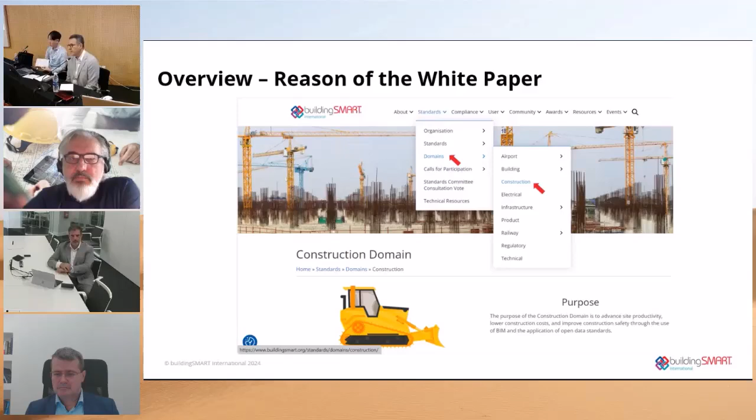tackle site productivity. What can we do to lower construction costs? What can we do to improve safety in construction, which is indeed one of the most important topics? But leveraging BIM technology—this is, of course, the core technology that we are tackling, but BIM technology using open standards.

The work this white paper tries to show is to summarize the different problems we are facing today, proposing new approaches to this digital transformation. I'm pretty sure we have all been facing problems trying to digitalize our processes, right? Even if we are not talking about construction, even in our personal lives, it's a little bit complicated, okay?

Of course, we are going to present, as I mentioned, some case studies, and provide more detailed information about how we can help solve this issue.

The white paper is applicable to any construction project. It doesn't matter if it's a building, infrastructure, bridge, road, etc. It's quite a general overview. It will also be quite interesting material to introduce newcomers or new people in organizations to understand what this issue of digitalizing a construction company is, or what is happening in the digitalization of the construction industry.

Three topics, very simple: the problem. We all face the situation of having different software vendors, different solutions, quite specialized, but it's quite complicated to communicate between them. And this is one of the issues that exists today.

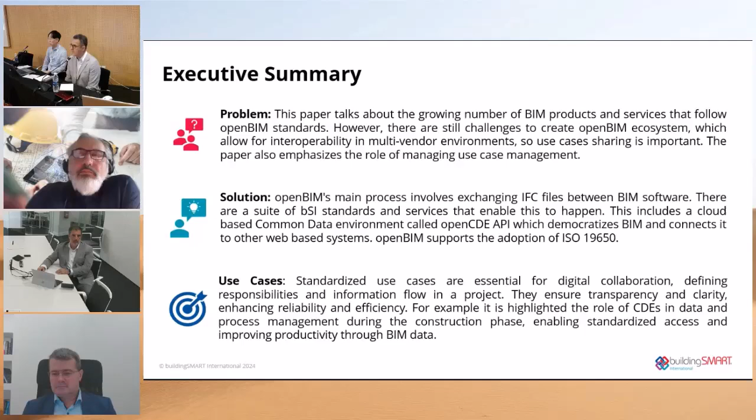Now, I mentioned the use cases—the way to show examples today is not really standardized. And one of the conclusions, maybe I'm talking too far ahead, is that we need to standardize this process for the new people, the new construction companies embracing digitalization, so they can leverage from other cases.

A bit of what has mostly been said, but I just want to focus on that. In this white paper, we try to summarize the challenges faced today and the opportunities, because having a challenge is not necessarily bad—it sparks creativity and opens doors for new businesses, new business models, or new opportunities to be more efficient.

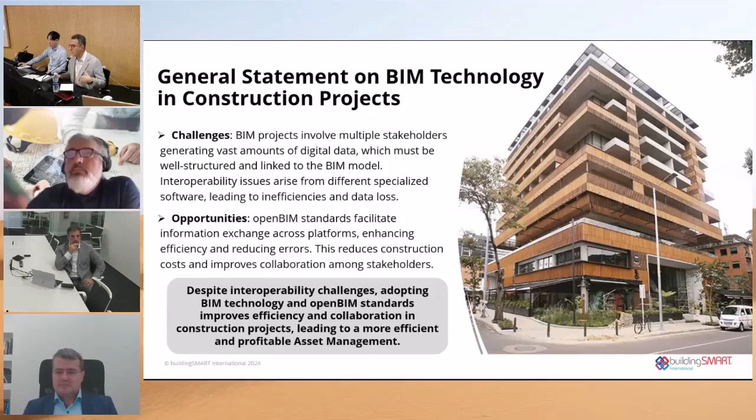So despite the fact that there are these interoperability problems communicating between software and data, these standards and new protocols, templates, etc., open up the opportunity to be more efficient, more profitable, and manage more information in just a few clicks. So I will hand over now to Ken, who will go deeper into the problem we are facing.

From this part I was mentioning, there are many problems, and in one word, I think we need much more communication, because Open BIM is some kind of concept. There's the concept, and of course there are some rigid standards defined by buildingSMART. But it depends on the software vendor if we use or create the software ecosystem. So creating the software ecosystem, we need some knowledge - Open BIM knowledge first, and then later individual software knowledge. But to combine many software and formats and create innovation, we need some kind of test, and that's a burden much more to us. That's I think the biggest problem, and we need much more information about Open BIM.

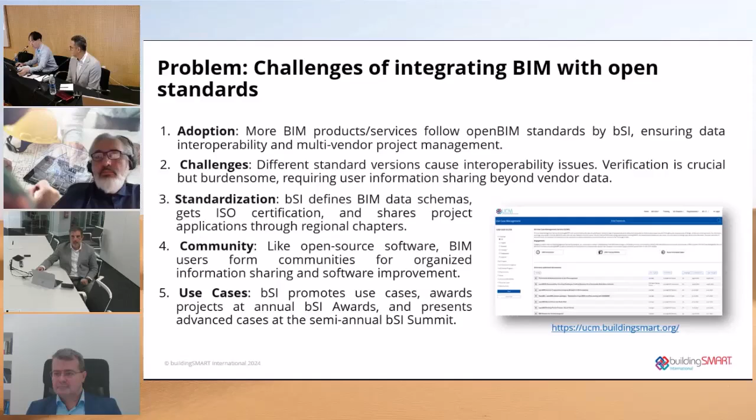And then the next one is the solution. The solution is not only building the community, but also technically we have many solution choices now. As you know, well, excuse me, yes - here comes the solution. An interoperability problem should be solved by the Open BIM community, like BSI. But we are now facing technology issues as well.

In the traditional process, exchanging of BIM data relies on IFC files shared bilaterally between software. But now, in the modern process, our working environment consists of many cloud systems, including the CDE. So it's a much more diverse solution, where we can share data with all project stakeholders simultaneously.

But on the other hand, we should understand new technology on the web, such as OpenCDE and an API named OpenCDE API, and bSDD, IDS, and validation services, etc. So those systems are working collaboratively on the network and based on API technology, which is commonly used worldwide in systems such as SNS and IoT domains. Therefore, we need much more collaboration with other industries and overcome technology obstacles by working together. This big shift has made BIM more accessible and interconnected, enhancing collaboration and innovation in the field, I believe.

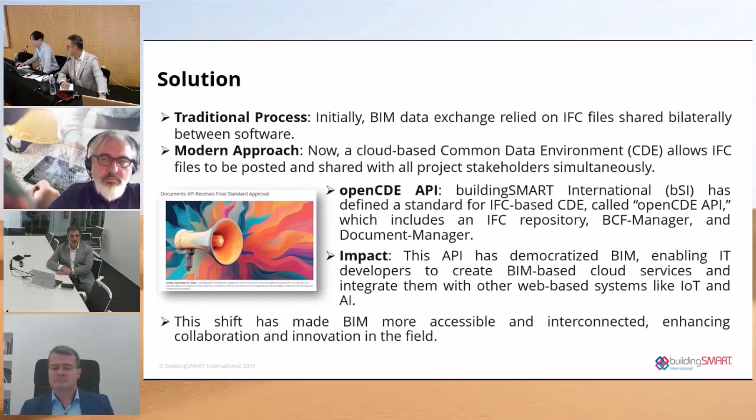The next slide is the ecosystem of BIM, specified to the construction phase. So it's slightly complicated, but it's very simple.

In the traditional process, there's the BIM software, and then the IFC file. And at the bottom, there is the domain of IFC. At the beginning, bSI established IFC for building. But as the IFC version went up to 2x3, version 4, 4.1 and 4.2, now it covers not only building but infrastructure, such as road, railway, and bridge, and facilities such as the airport, the port, and power plant.

Technically, IFC has two main roles. One is as a file format, and another is as a data schema. At the beginning, file-based data exchange between BIM software to secure interoperability was IFC's main role. But as you know well, now we have cloud-based data exchange with CDE. CDE technology has been developed with the evolution of IT technology.

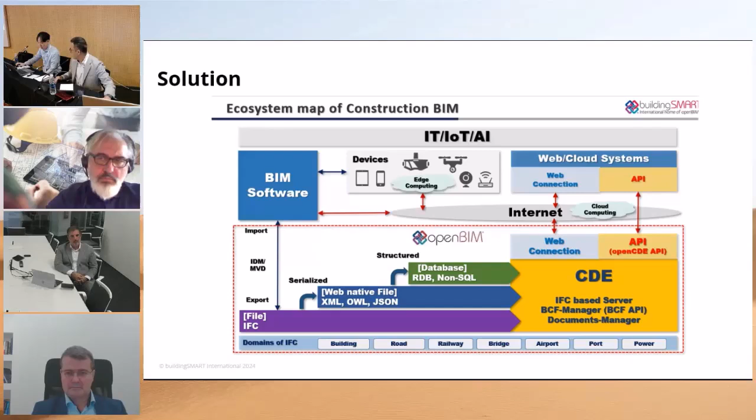A CDE standard named OpenCDE API was defined by bSI, and we can have interoperability among OpenCDEs now. That's the situation, and it's a very big change and big solution for us. So next, please. Yes. Thank you, Ken. So we'll hand over to Konstantinos, who's going to explain about the standards.

So thank you a lot. I'm just looking at the time. It's 12:30, and at the end of our presentation we have very important examples and a summary of use cases. So I would suggest going quite fast through the existing standards, and if we have time, we will come back. On the following slides you will see the naming of the existing standards we have, and they are really helpful in setting up a digital work environment.

So here you see the 19650, which gives us a frame about how we should work together in digitalization with documentation, graphical data, but also non-graphical data, and gives us a direction for how to go step by step. What we have to do with all these standards is use them, of course, but detail them, because it's not a one-to-one copy you can do with the standard. The standard is just giving you a frame. We have to detail them to connect them to our daily work. So 19650 is very important, giving us an overview of how to organize information management. Next slide, please.

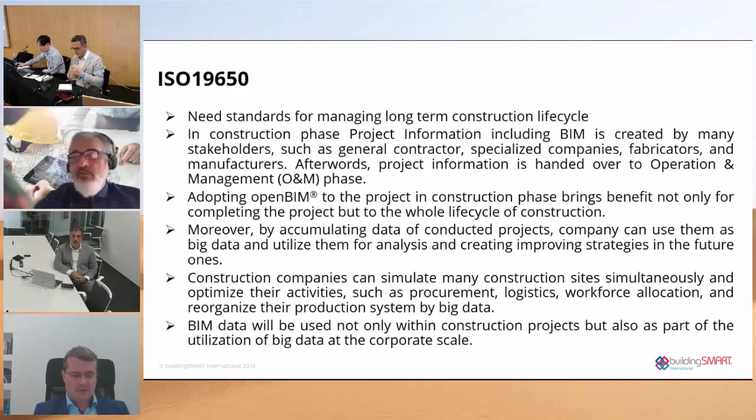As I already mentioned, the need for the standards is to manage long-term construction life cycles. This means that all people have to work together. For more detail, there are well-prepared slides I would ask you to read after this presentation. So let's go to the next slide to come nearer to our examples. buildingSMART is offering not only standards but also services which help us connect these standards you have seen, the ISO standards, to our daily work. It's vendor neutral, and it supports the collaborative process. Next slide, please.

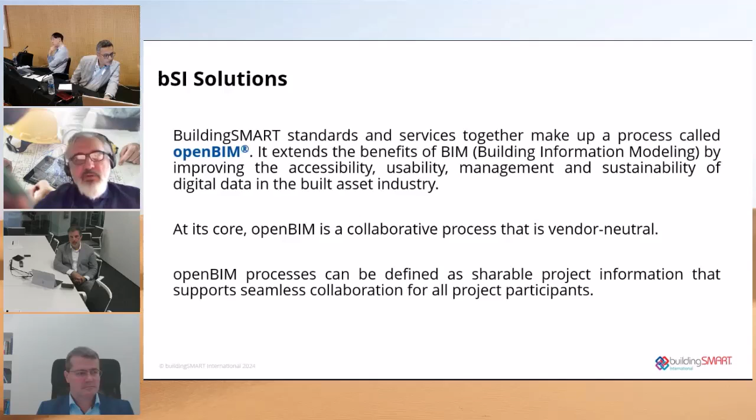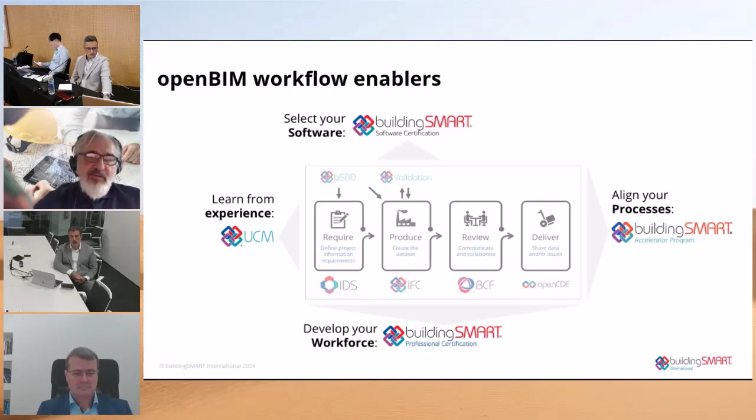So here we have one slide, a small overview of what we will show you in the examples about how this workflow is enabled. It usually starts with use case management, and we will dive into use case management some slides later. Use case management is really the base to organize the process chains. And this process chain is then supported by IFC, of course, by IDS, BCF, and OpenCDE standards, which are part of the next slides. So let's start with IFC. It was quite fast, but it starts with use case management. Okay, the next slide.

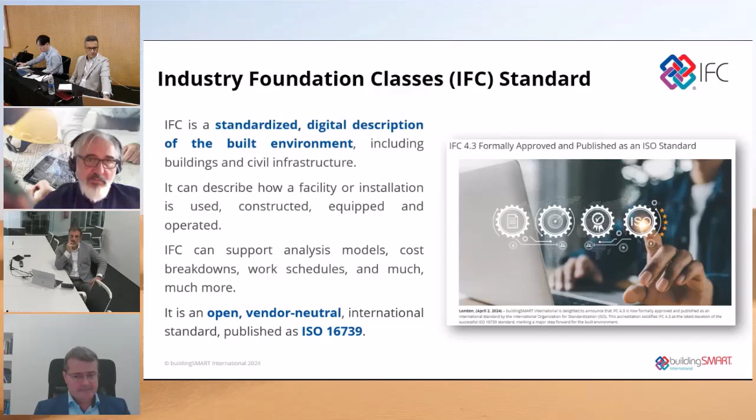The next slide is about IFC. IFC is standardizing the digital description of a building, of a built environment. So we have a clear definition of the objects we are exchanging, and it's neutral, and it's an ISO norm. This is very important, that it is a defined norm and can be used on the quality standards we have defined. Then it comes to collaboration, and BCF was quite a good move by buildingSMART to be able to transport issue management and coordination issues through different software.

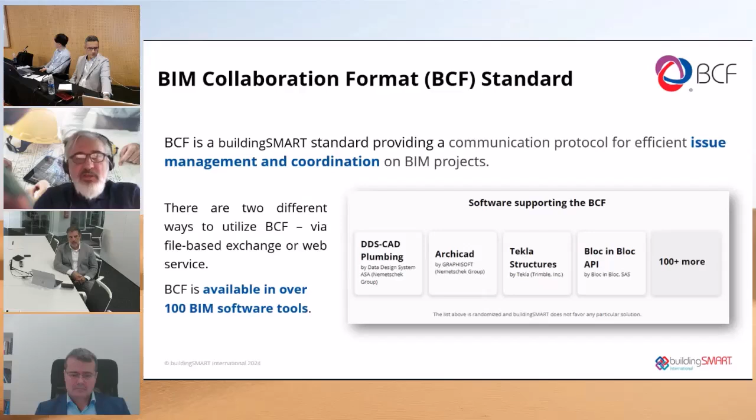And already BCF is available in more than 100 software tools, so it's very well implemented, and it really helps us to transport all these issues. So next, there's bSDD, which I think still has to be implemented more by the software industry. I have to ask the software industry at this time to really look at how to connect this bSDD into all the software solutions we have.

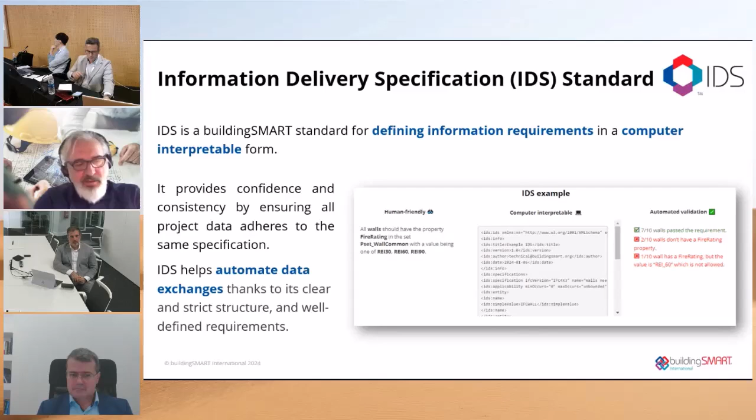So then we come to the newest thing of buildingSMART, which is the IDS, Information Delivery Specification. This is a very big base and big move from buildingSMART to allow us to interchange digital data readable by a computer. So whatever we define about how we want to structure our communication with data is not only written in the EIRs and the BEPs, which are read by people, but the content of these documents can be reflected in the IDS. It can be exchanged automatically. This will help a lot in getting more efficient. So next slide, please.

So now we come to the use cases. So sorry for being a little bit fast, but I hope now we have a lot more time to dive into the examples. So please, colleagues. Berko, please. So thank you all for these nice introductions. I will just briefly explain to you one case study.

It was a National Football Stadium project in Serbia, which is part of a much larger project, since Belgrade is going to host Expo 2027, and there is also going to be a huge retail complex and aquatic center. So the total value of the investment is almost 2 billion euros, and the football stadium has 52,000 capacity.

So actually in Serbia, there is significant BIM progress, and BIM is implemented on a lot of large-scale public projects and also private projects. So the main goal from day one was based on the investor request. If you can go back to the previous slide. Thank you. So the Serbian Building Directorate, as investor, and the Ministry of Finance wanted everything done in an integrated environment, and everything based on open BIM.

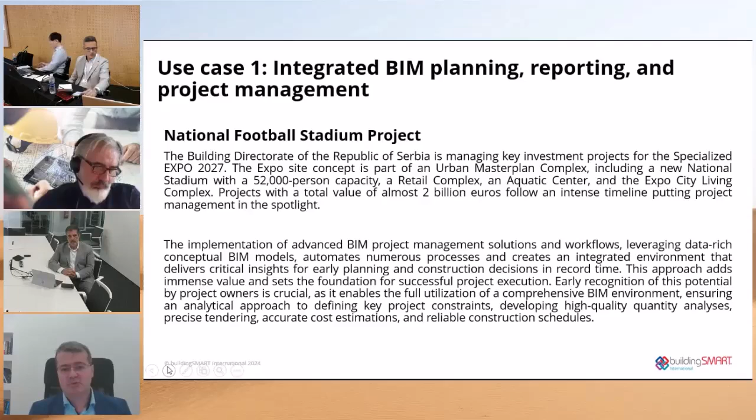And detailed location-based scheduling was also implemented. So in the initial stage, in just 2 weeks, various workflow scenarios were created. In total 6 different options for how to build this, because as you can imagine, the construction schedule is very tight. On that project, there are more than 1,400 piles, some of them 28 meters. So the structure is very complex. And of course, the client has a very tight deadline because it has to be opened together with Expo 2027.

And based on this analysis, the entire schedule duration was reduced by approximately 12%. The entire IDS was implemented, of course, and bSDD as a standard, and later, when this analysis was finished, now I will ask you to share the video which was created in just 2 weeks from a pure BIM model, and please lower the sound, Laura, so I can talk during this. Okay, so this simulation was automatically generated.

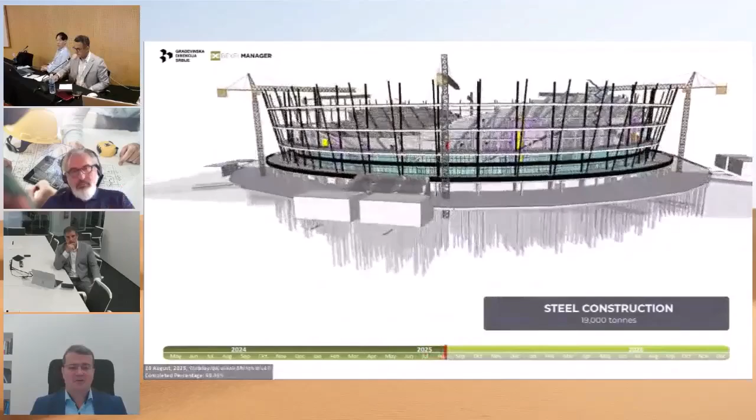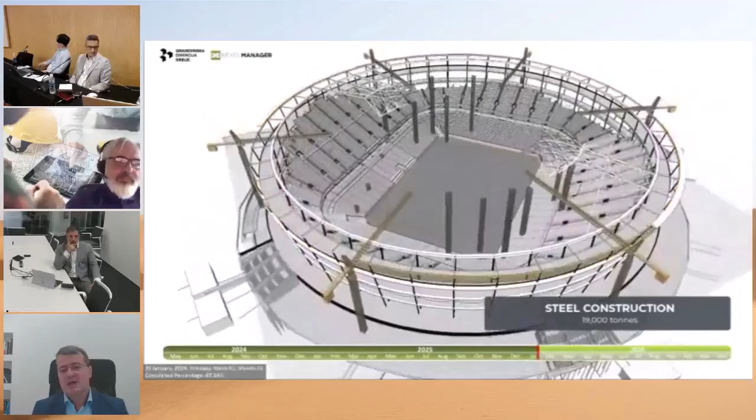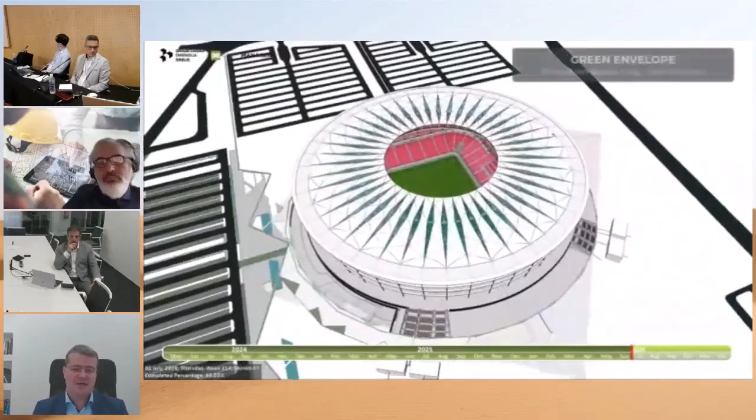Luckily, we had experience with a lot of football stadiums for World Cups and other important stadiums. So thanks to this intelligent planning and experience gathered from previous projects, it was possible for everything presented here to be done in just 2 weeks from pure BIM models. So the simulation and the Gantt chart contain almost 3,000 tasks, and around 1,400 cost items were generated.

So now in this video, this was integrated with the Expo project. So the total distance now is slightly more than 2 kilometers. In this part of the video, you can see the entire infrastructure in between.

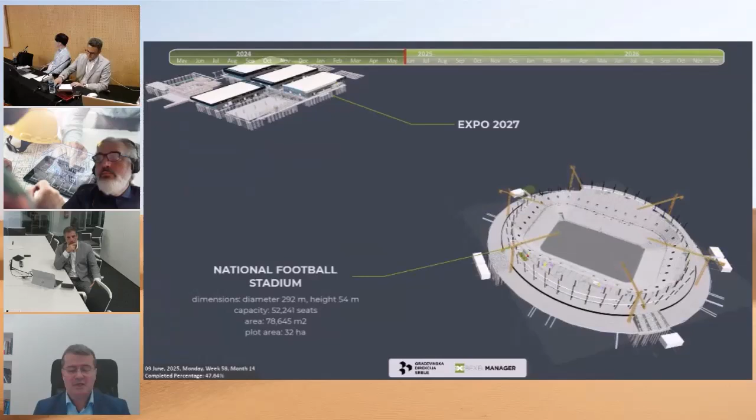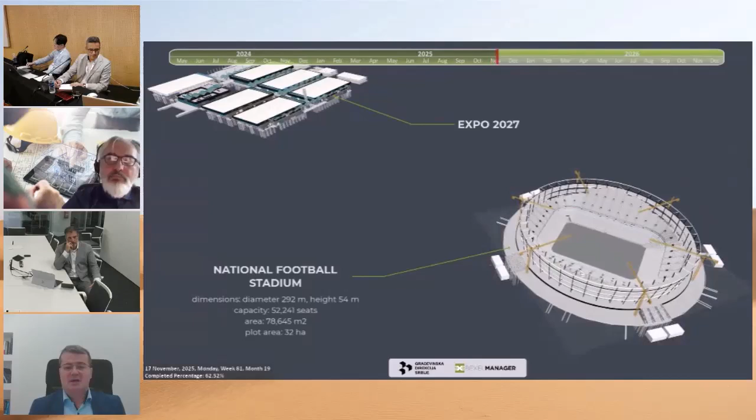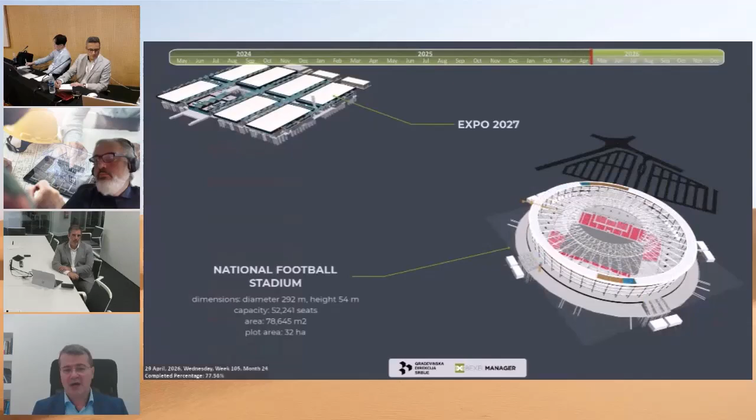So all the pipes, roads, and everything was integrated in a single ecosystem. The challenges here were that, as I mentioned, properties were not there. So we used the data enrichment. This is a small enhancement to IDS. So the system automatically recognized certain IFC elements and attached to them the cost code.

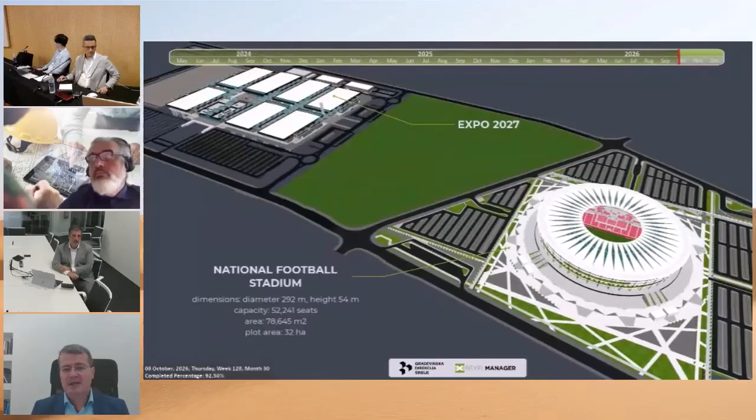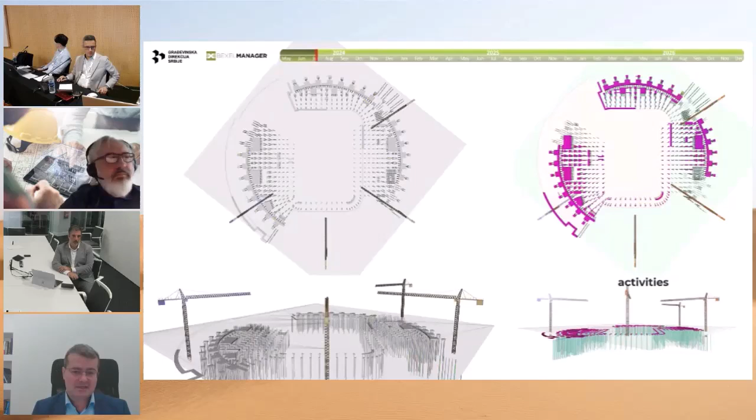It was decided by the client that we will use Uniformat 2010 as a standard, and all these analysis and cost estimates and cost classifications are based on Uniformat. What was important is that in all these analysis, leveling resources and flow lines were implemented. So when the schedule is generated, it was very important that there are not going to be construction clashes, and that the two main contractors will have realistic and optimized targets.

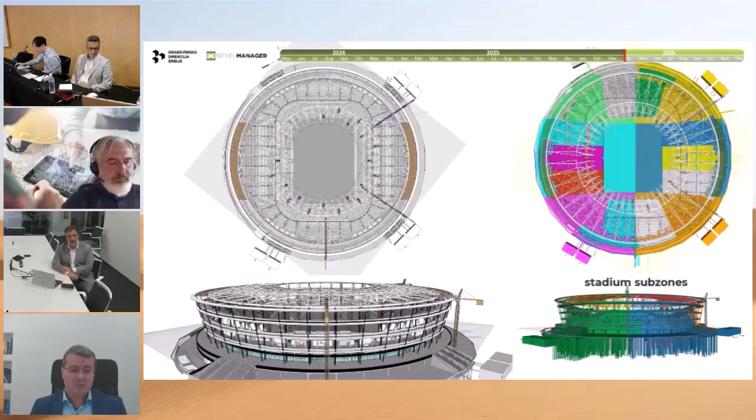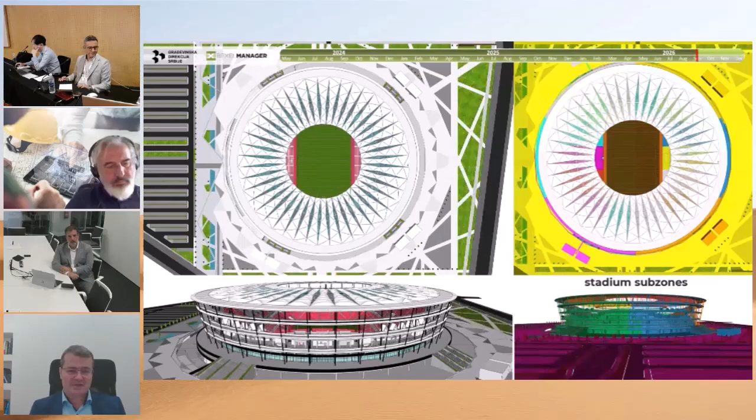The success of this project in the initial phase was also very important from, let's say, an open BIM marketing perspective. So this was the first time when this video actually was presented on all main news and mainstream media, not just in Serbia, but in the entire region. So it, let's say, attracted people to learn more about the benefits of BIM and open BIM.

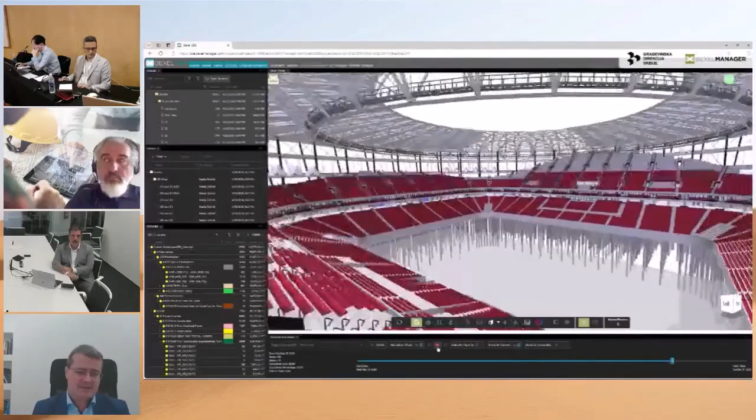So in this case, you can see the CDE. Everything is, of course, in Bexel CDE based on IFC. So how the quantity takeoffs are generated. So in this case, we can see that almost 115,000 cubic meters of concrete has to be installed. These are the floor plans.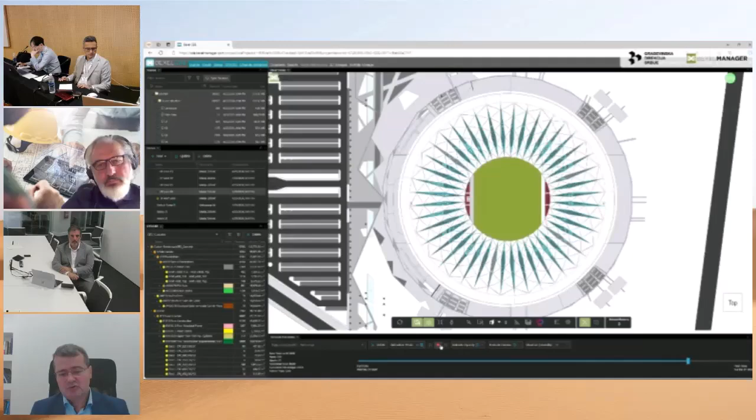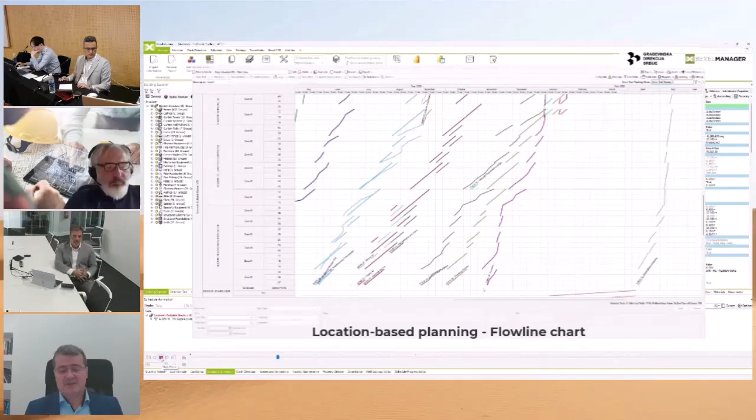And I would like to also mention that now, since the design is optimized, all the quantities are produced, and based on that, interactive dashboards are generated, which allow users and top decision makers to easily track the progress and see, in this case, the balanced resources, so they can track the progress and always have planned versus actual analysis, so they can know if they are ahead of schedule or behind the schedule.

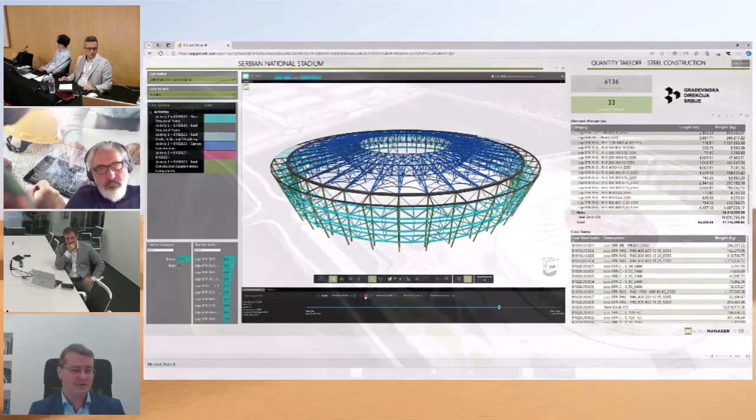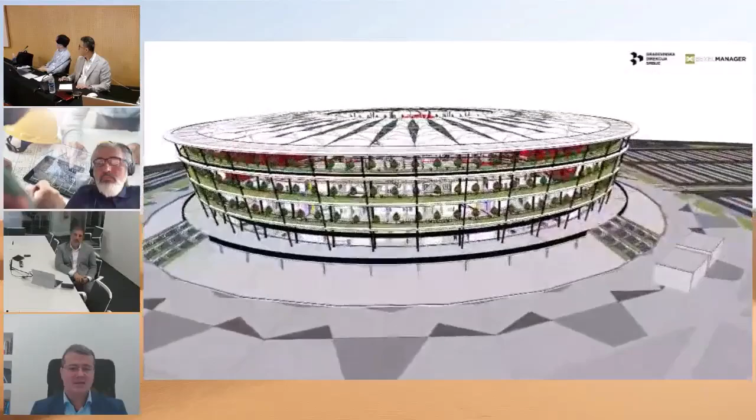I would like to also emphasize that the main contractor in this case is Power China, one of the largest contractors in the world. In the beginning, they understood that this is more a system to control them. Now they can really rely on all this information, and their main planners sit down with the BIM specialist to analyze the actual progress, to identify where are potential delays, to run Monte Carlo analysis and so on, so they can really easily understand what's happening with the project.

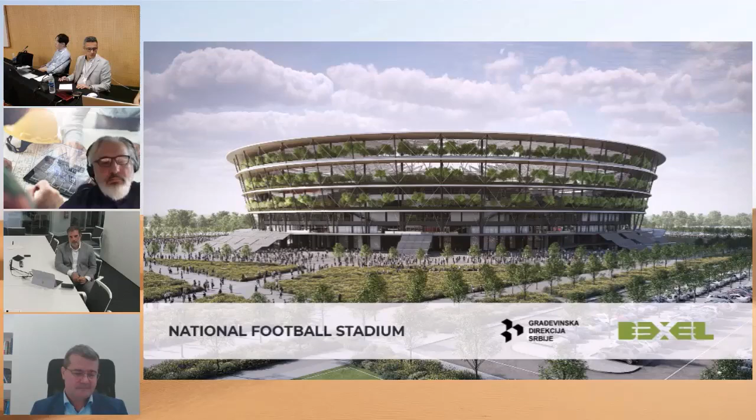You can now switch maybe just to the slides again. So some of the key results were that without automation, first of all, BIM standards and open BIM standards have to be used as much as possible. And what Konstantinos, Ken, and Jorge mentioned before, it's very important to focus on real achievable use cases, to define accurate but also achievable IDS checks, so not to ask for hundreds or thousands of properties which are mandatory and then not use them. So this was the first takeaway.

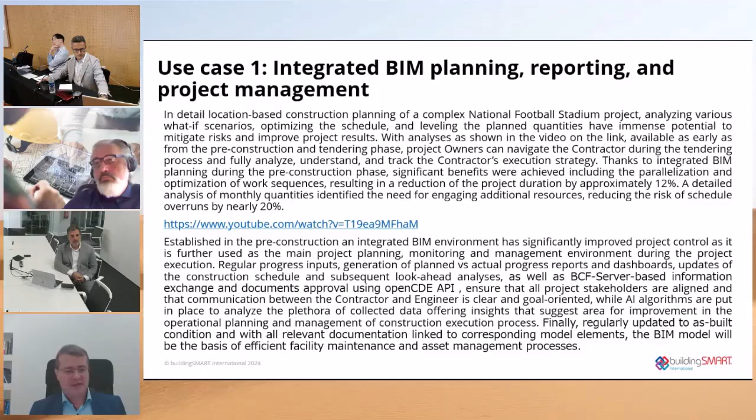And you can see now the process of quantity takeoffs, the integrated 4D/5D environment, and various dashboards are there. Then the progress is tracked directly from the site, and the BCF workflows and OpenCDE workflows are implemented, so everybody who's working in an open BIM environment can use their own tools to track the progress. And then, as I said, project management reports. In this case, we see a delay analysis, so we can actually see what's happening on the site, where we are having delays, or we are working ahead of planned schedule. And if you can move to the next slide.

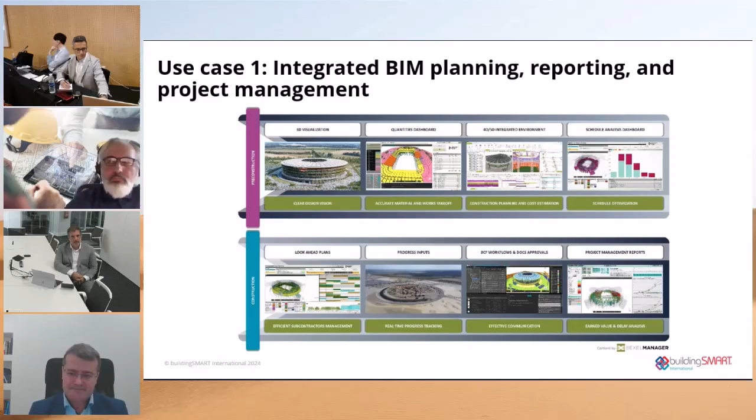One of the most important benefits of BIM on this and other similar projects is increase of trust. And the value of trust is huge on the project. And if we have trust, we can really execute the projects in a much more efficient way, and we can trust each other. So in this case, compared to similar projects we had in the past, there is 84% less variation in claims because we trust each other and we are focusing really on some changes which were made and of course have to be respected. So this is one thing which tremendously helped. We usually spend a lot of time in claims and disputes, so maybe less job for the lawyers, but for us as engineers, a much better situation.

And the approval procedure, which is very important for contractors, is much faster, so we improved this 5 times, and now it's 80% lower duration for the interim payments verification, and of course, contractors and subcontractors can get their money almost immediately. So thank you for this. Later, of course, if you have any questions, it would be my pleasure to answer.

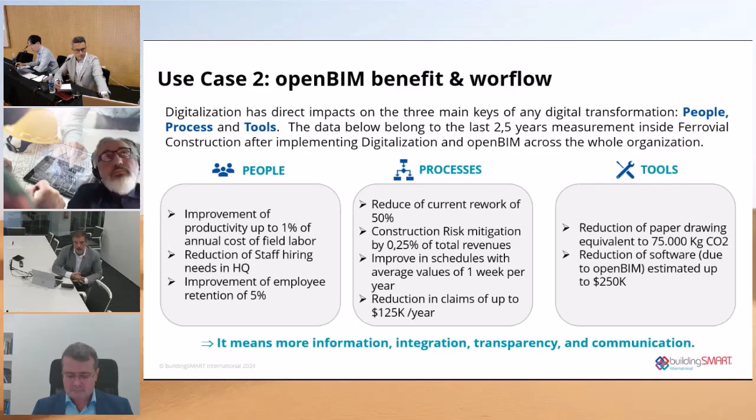And for example, because of the use of open BIM and a collaborative way of working, we took away a huge amount of paper. That paper translates into carbon emissions of 75 tons of carbon emission reduction, and this was measured. So all these data are real data in an annual way. These measures are annual, and also we reduced the amount of software that we had to implement by $250,000 per year. If you go to the next, please, Laura.

If you translate that into money, the investment of implementing open BIM digitalization and a collaborative way of working, because you need training, you need to have tablets, for example, instead of paper, there is an amount of money that you have to invest anyway. But the benefit was 2.67 times bigger than the cost of the implementation. Laura, the next, please.

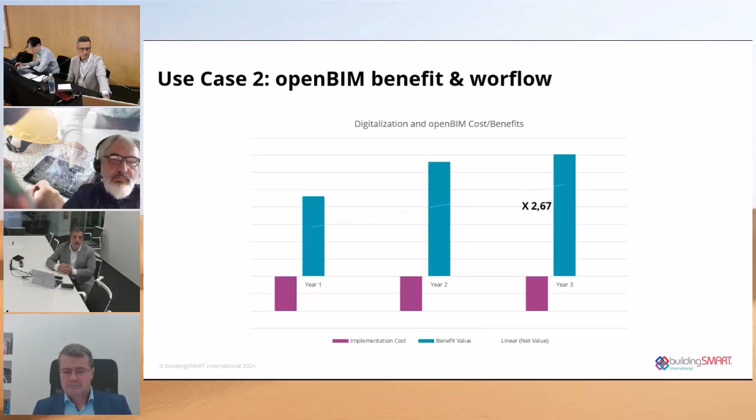The second example is a Chilean company, Icafal. I worked in Chile for more than 8 years. They are a real estate company that also does construction. So they decided to implement open BIM and a collaborative way of working, and they began measuring that. In Chile, they measure everything in order to know how to improve. And these are public data that they share in several forums.

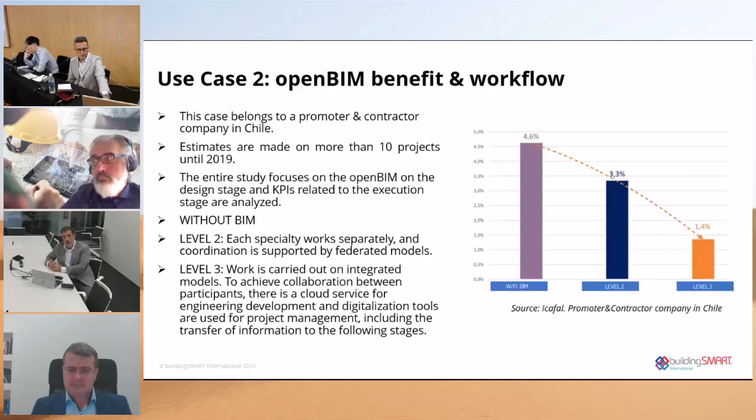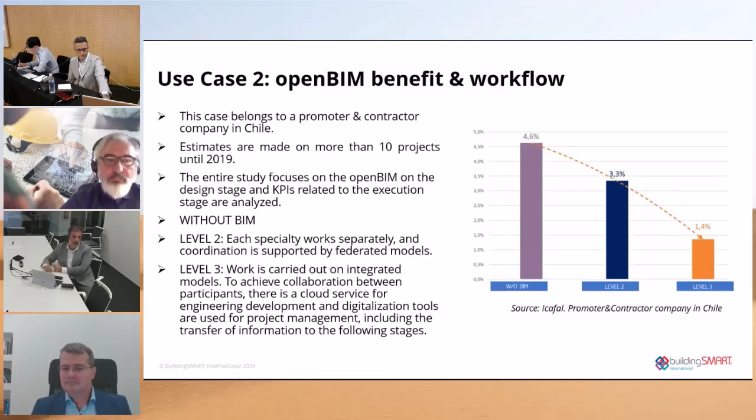They measured the initial way without any kind of BIM, what they call level 2 with isolated open BIM standards, and level 3 with a collaborative way of open BIM. And they measured a reduction of excess cost during construction. In the beginning, they had like a 5% excess of cost in their own construction projects that they were developing. They reduced that to 3.3%. And after all, they got only 1.4% of increase of cost. So maybe you are thinking that this is an improvement of 3%, but in a relative way, this is a reduction of 70%. The next, please.

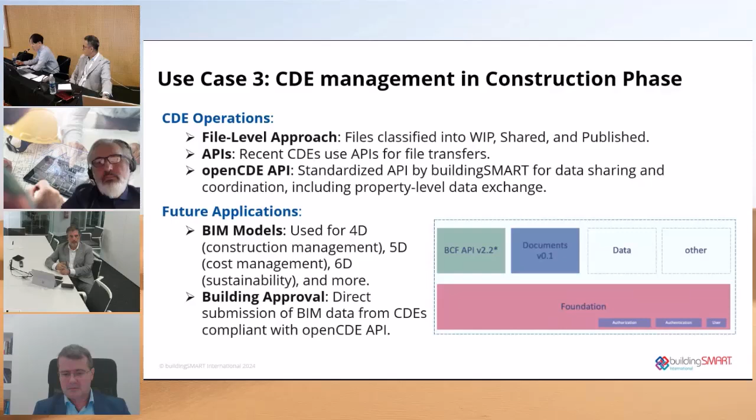So in the next step, we will adopt this kind of API and change the environment. And the last one, please go to the next slide. Yeah. So if you can create this kind of very basic foundation of data management, a scalable data platform, you can step into this kind of innovation area.

In the previous session, I was in the award session for the construction division and the infra division, and I was the main jury. So I saw the 5 very innovative projects, and I saw all of the ecosystems of each project. All of them are very excellent, and of course, they're the best practices of BIM. But in terms of open BIM, we should think about the file format first, and then how to manage those files from the beginning of the project to the end of the project.

So that kind of process management and data management combination is very fundamental. If you do not have that kind of very rigid basis, all those trials of innovation will be in vain. So here comes the combination with robotics and digital twin.

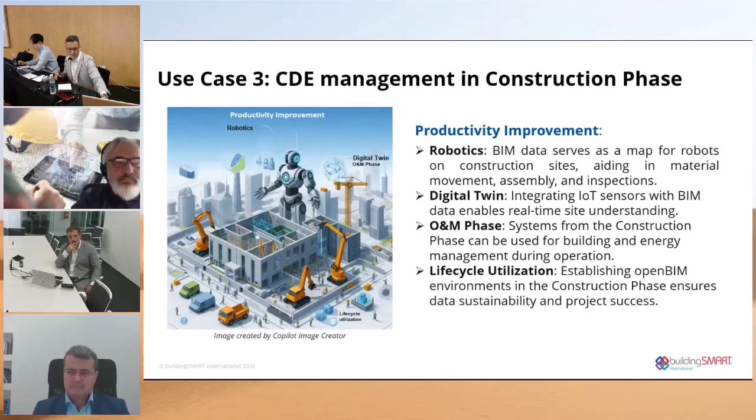Yes, may I try to share my screen because it's an animated presentation. Maybe it will be easier to change. Let me see. So let's see. Oops. Yes.

So yes, you can see my screen. To summarize what we have seen before, the 3 examples, what is the common thing of the 3 examples or 3 use cases we have seen? You have seen that they gained efficiency because they could connect their individual IT solutions in a way that they can interchange data. And one of the main components why this works is our use cases, which are a little bit underestimated in the discussion so far.

And let's have a deep dive a little bit into use cases. So the role of use cases in construction digital transformation. The construction industry relies on specialized collaboration, as you have seen, across planning, building, and operation phases. Each project is shaped by its specific use, local conditions, and legal requirements. So Chile, Japan, Serbia, you have seen all that. This has led to a division of labor in our history and the development of tools for communication, organization, and contract management so far.

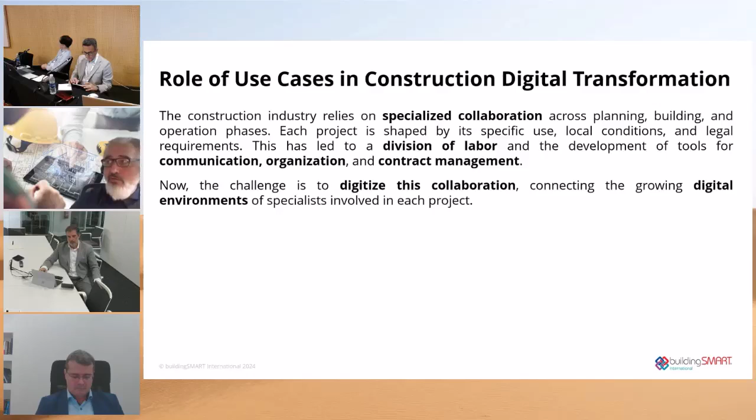So we do have these tools, but these are not digitalized historically. So now the challenge is how to digitize this collaboration, to connect the growing digital environments of specialists involved in each project. As each building has unique characteristics and stakeholders, the goal is to link their digital solutions. We can't ask all the people to use the same tools, but we can ask to link them to ensure seamless information exchange and that each participant's output meets the expectations.

So this challenge isn't new. We are not the first in the world to discover that. Other industries have addressed that and have defined use cases, which are consensus-driven frameworks for the exchange of required information. For example, the banks sat together and defined what we expect in digital exchange if a person is going to use an automatic cashier machine. So this is a use case. But the problem is, while it may sound straightforward, this task must be undertaken by all of us being part of the industry. So here's our contribution from the construction execution phase to address this problem.

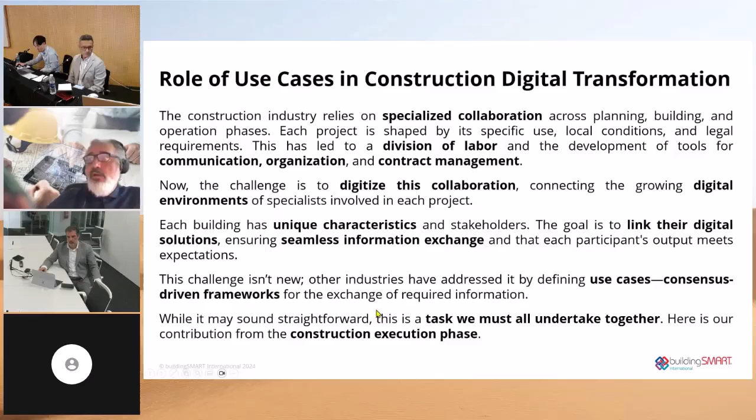So what is a use case and how does it connect to my solution? A use case is a standardized description of a scope of work, what I'm expected to do related to the project phase, including the relevant stakeholders, associating digital input, output, and exchange requirements, as you have seen before, which is already written down in the standards that we have to do. Yes, we have to. So the process as well as the prerequisites to achieve the specific goal on a project.

So it's telling us what data we're going to exchange on purpose, and enabling us, as it is a breakdown, it's not the whole in one, and it enables us to do that step by step and establish the 100% quality of what we want to exchange. What it doesn't do is tell you how you have to do your work. It doesn't tell you that you have to use this or that software, but it describes how you communicate your results and get your input. So what is what I produce? What is what I want to get? So standardization in this case doesn't dictate what you have or must do.

Standardization in this case is providing a common foundation for defining use cases and ensuring anyone's understanding and applying them easily. So we share the common base, the common methodology, a description, how we define use cases. Everybody can read them and react to them. But therefore, we have to do that together.

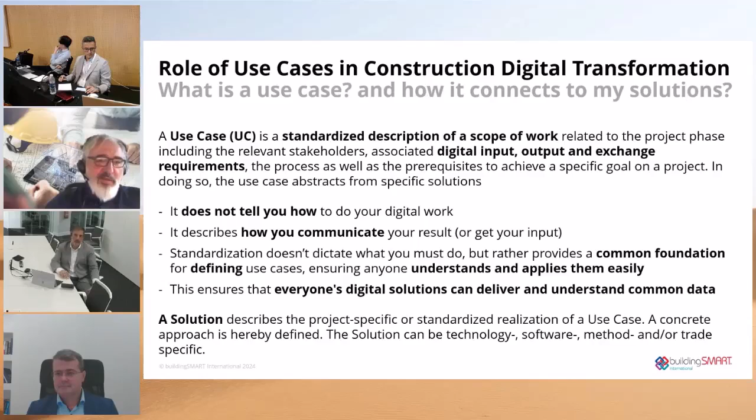So solution can be technology, software, method, or trade-specific. Let me explain that in a picture, maybe it's easier to understand. It's not about the solution, it's about describing the use case management, how they are working together. I'll go through that picture with these yellow frames, and I'd like you to first look at the yellow pictures, and then we can discuss the whole picture. So it starts with use case management, where use case management of buildingSMART can be used, and this is a public definition of what we are going to do in the market.

This delivers information like information need for input-output, addressing responsibilities and processes, and quality of data. You are used to that already. You do that on every project, every contract via EIR or via BEP.

The difference is now that it is here - you see the IDS symbol - that this can be produced automatically out of the definition. So you don't have to do that project specific every time, but you can use it in every project.

So what is the result of that? If you do this chain, the impact to the market is we are enabling digital process chains through that. Clients, designers, constructors, operators can more easily connect their systems because they are defined digitally in advance and produce a digital description. So this is the base for market digitalization. If any country wants to achieve digitalization of their market, they should think about that.

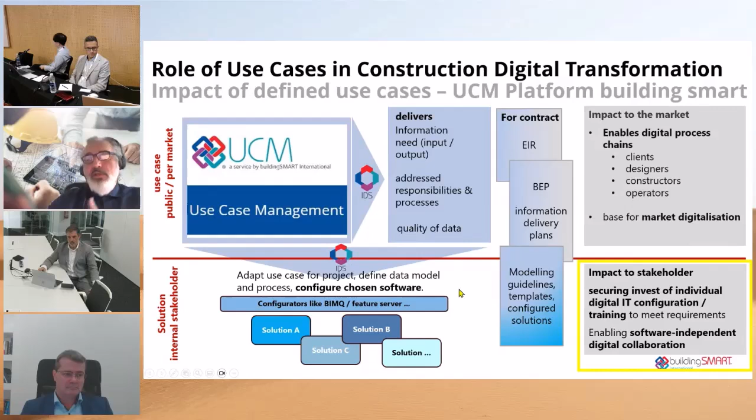So I don't have to adjust it day by day. And it enables software-independent digital collaboration. It also enables software vendors to understand what solutions I'm asked for in the market. And this is the bigger picture in use cases.

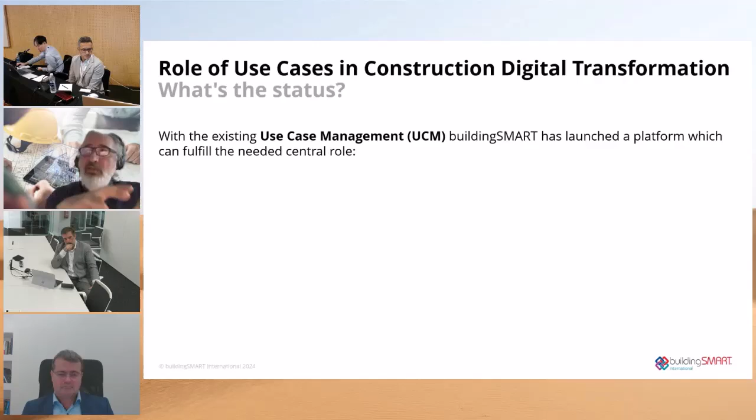So if we have a picture of where we want to go, what is the status? Where are we now? We have an existing use case management by buildingSMART, which is already launched as a platform, and you can find it on the internet, which can fulfill this needed central role, because we need a central place where we discuss common things. It's facilitating a needed common definition for use cases with methodology, semantics, and syntax already.

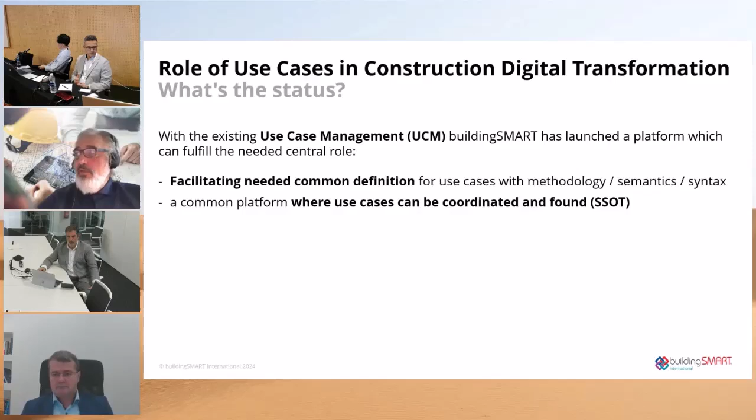So we have already things structured there, so we can understand each other across markets and languages. It's a common platform where use cases can be coordinated and found. It's a single source of truth to find these definitions.

The use cases described can expand the concepts of Open BIM and MVD. We have to think beyond just geometric data like IFC. The open concept of Open BIM means we can understand each other about what we want to do. It extends Open BIM towards exchanging, processing, and interpreting information according to specific roles and responsibilities. So Open BIM doesn't only mean exchanging an IFC file.

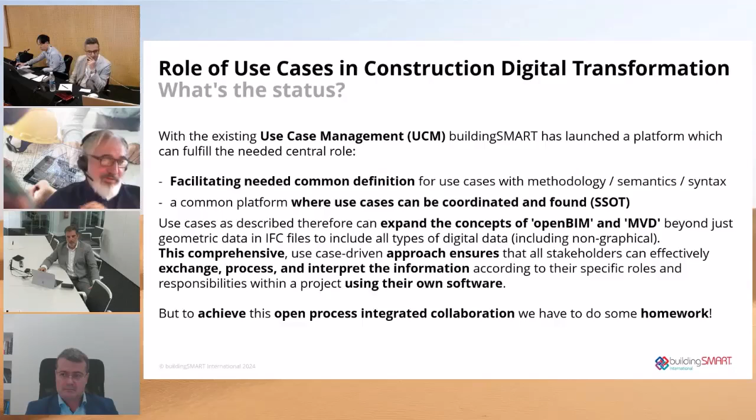Open BIM means we have the same understanding of processes. To achieve this open, process-integrated collaboration, we have to do some homework. We are not ready. We have a good start, a small start—a very good first step—but we can step on further. We have to do some things. What is needed, what do we have to do?

What is needed to make existing use case management become the determining key for open digital collaboration in the construction sector? This is what I would like to suggest. The UCM is not just a service—although it is already a service, it's not limited to that. It must also be involved in a strategic project within buildingSMART to continue its development and expansion. We are not ready, but we can step on and expand it.

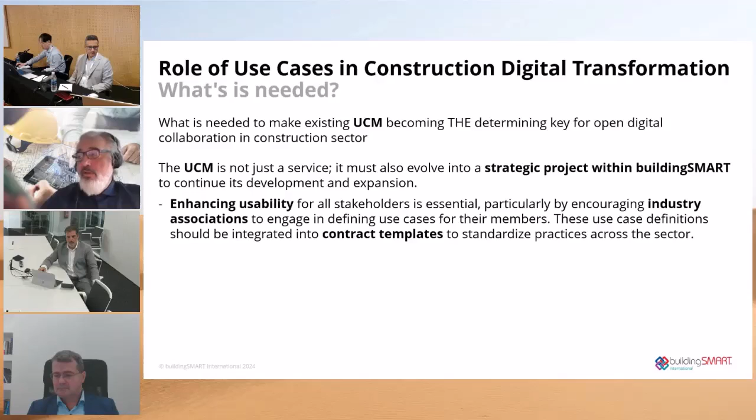So what do we have to do? We have to enhance usability for our stakeholders, which is essential, particularly by encouraging industry associations. I would like to address all industry associations to engage in defining use cases for their members, because they define the market rules, how we work together, and now they have to do that digitally. These use case definitions should be integrated into contract templates, so use cases are directly connected to our contracts. It's not only a technical definition, it's also contractual, to standardize practices across the sector.

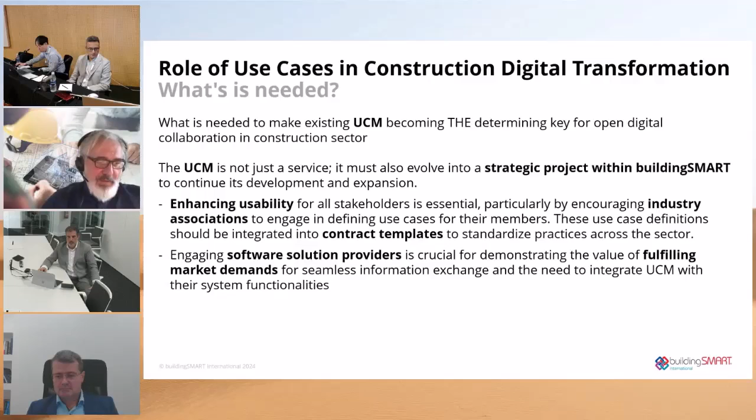I would like to emphasize that software vendors and solution providers should engage, because it's crucial to demonstrate the value of fulfilling market demands for seamless information exchange and the need for integrated use case management within their system functionalities. To summarize, it's not the best software with the best buttons that will be selected by the market in the future, but the best software enabling sufficient functionality with the best connectivity in the market. So everybody who's best connectable will be best asked for in the market.

And of course, the providers of classification systems, what we've seen—like BSDD—all these software classification system providers and beyond, should be involved to showcase how their information definitions can be applied in processes, potentially through the use of the buildingSMART Data Dictionary. So they are connected with the data dictionary, connected with use case management, and then these providers can see where their classification is used.

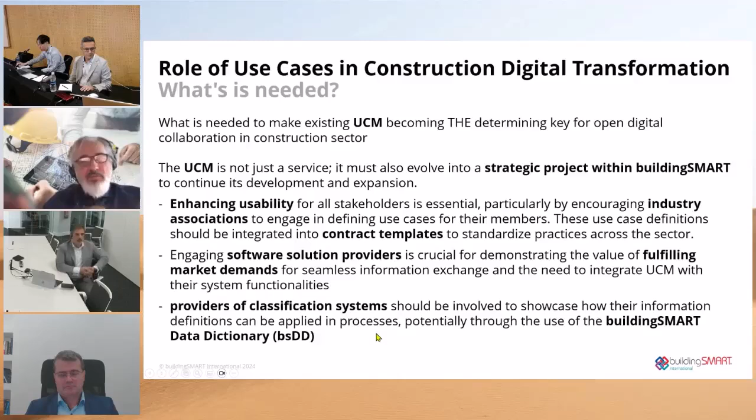Meanwhile, we are working on developing use case management to be the tool of process definition in the market. So both go hand in hand. Again, it's not somebody else doing it—we have to do that.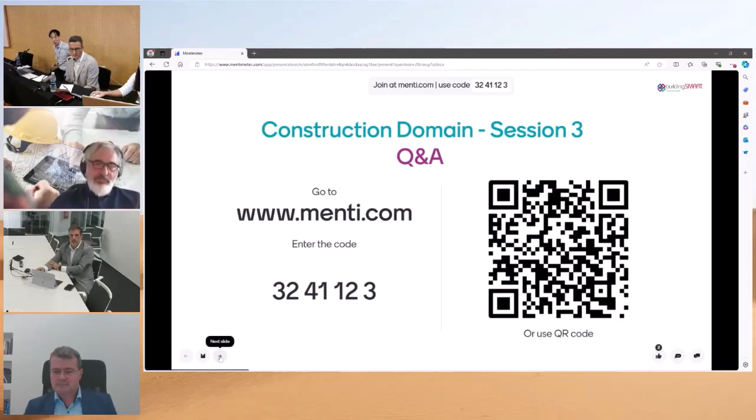The first question is: what is the main purpose of Open BIM? The options are to reduce project costs, to ensure data interoperability across different software platforms, to create 3D models, or to manage construction schedules. 80% of respondents are going for the second one—to ensure data interoperability across different software platforms.

The second question is: which phase of a construction project benefits the most from Open BIM? We have the planning phase, the design phase, the construction phase, or the operation and management phase.

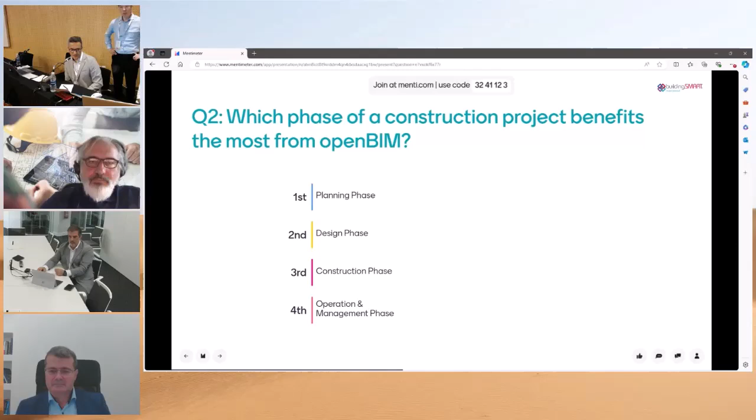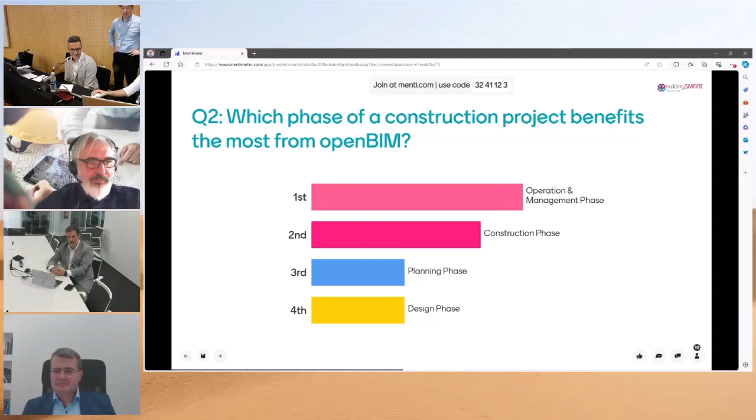Yeah, okay, it's a competition between the construction phase and the O&M phase. Okay. Okay, great. So we're going to launch the third one. But certainly it has a good relation at the end. There are more people using different types of solutions, so it's more important to have interoperability in the construction phase.

Third one: what is the primary benefit of using Open BIM in construction projects? So we have faster completion, improved collaboration among stakeholders, lower material costs and cost savings, or increased labor efficiency. Okay, collaboration is, for the moment, having more share in the answers, and secondly, increased labor efficiency.

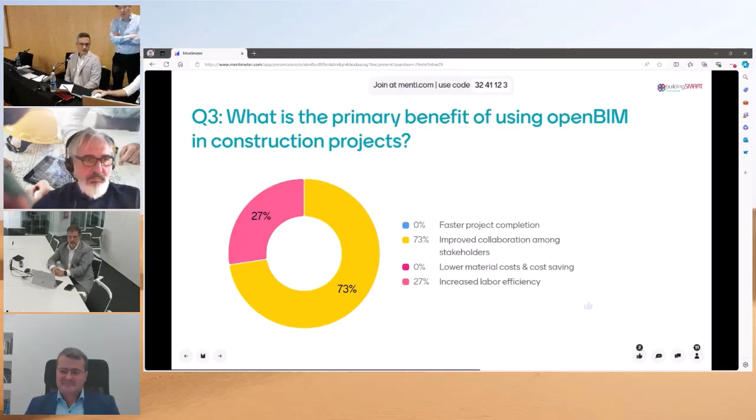Yeah, quite interesting answer, but I think collaboration has definitely been a topic that we try to tackle with the Open BIM standards. There's a fourth question, which I think is the last. What are the main advantages of BIM? The first one says the centralized management of information. The second option is reduction of design errors. Third one is improved project efficiency, cost saving, and enhanced collaboration among various stakeholders.

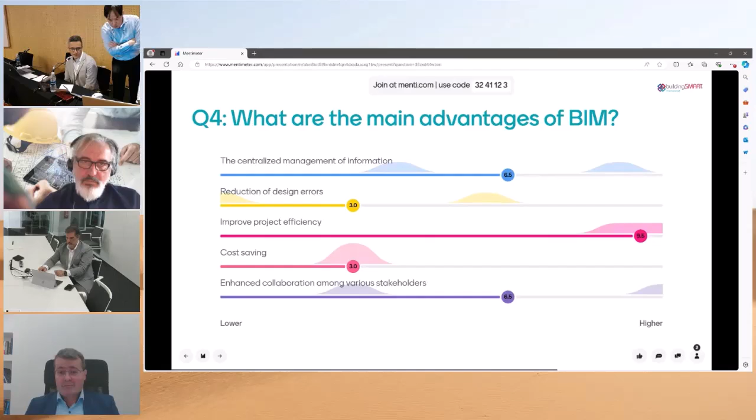Okay, improving project efficiencies. Okay. Centralized management of information and enhanced collaboration. Yeah. Improved project efficiency. Well, these are tricky questions. So the answer, let's say, is not one for all, but this is just an opinion of the crowd. So we appreciate your answers.

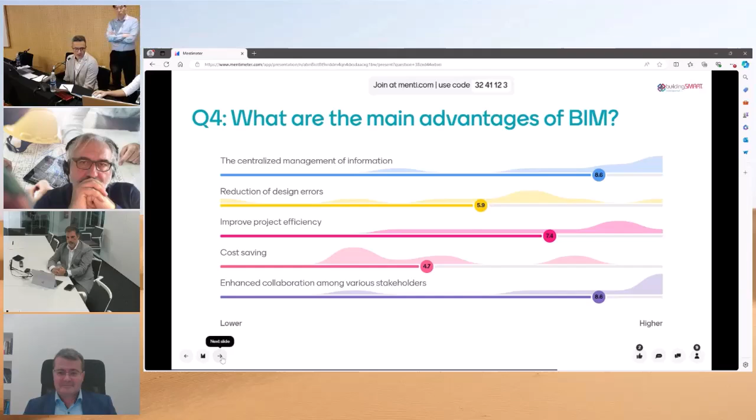There is a fifth one. So sorry. Now this one is: what are the benefits of Open BIM? The previous one was BIM in general. This one is about Open BIM. So we have different options: enhanced decision-making ability, interoperability between different software in the supply chain, improved productivity, cost and time saving, enhanced collaboration, and future proofing. Okay. Yes, here interoperability is getting most of the answers.

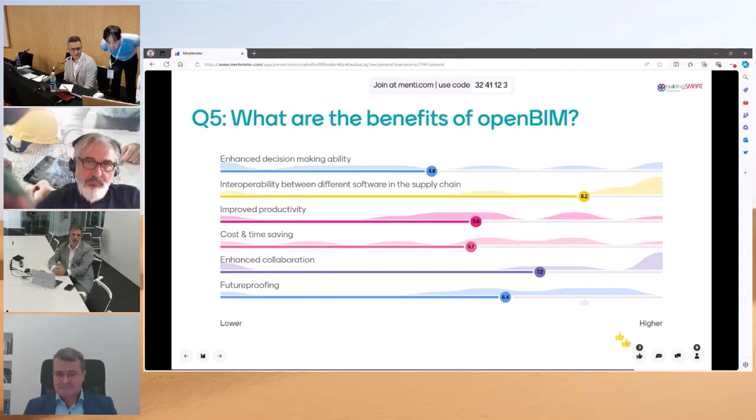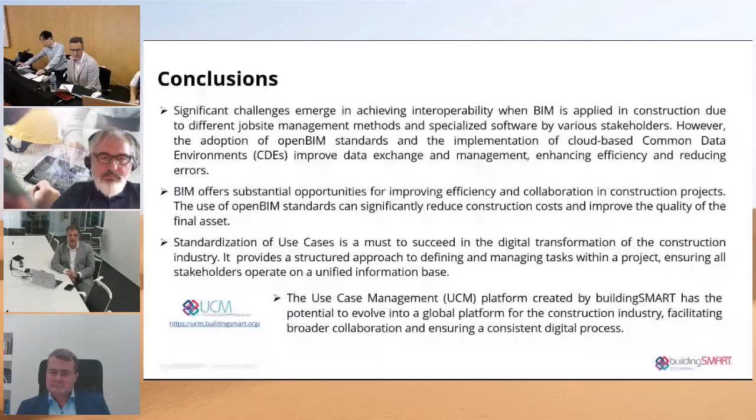Yeah. Okay. If there is anything you would like to share, you can post it in the answers. But I think we can go to the last slides to close the session. So thank you for your honest answers. This is just a survey of what we have understood, and also our opinions about what is happening today. On the conclusions, I'm not going to mention too much, and I think all the speakers have already mentioned the advantages. I will go to the last one, just to close.

Remember that we started by mentioning that we are launching a white paper document that is going to have all this information that we have mentioned, in a little bit more detail. The idea of this white paper is to provide a comprehensive overview of the key points that we are all facing in this digital transformation of the construction industry, especially when the digital transformation involves the use of BIM technology.

And we hope that by using the different standards, the ISO standards that were already explained, and also the Open BIM standards from buildingSMART, we can have better collaboration in the process among different stakeholders. And of course, this collaboration and interoperability will hopefully give more cost-efficient projects that, as shown in the different use cases, deliver faster, and, more important today in the context of our situation, more sustainable building assets.

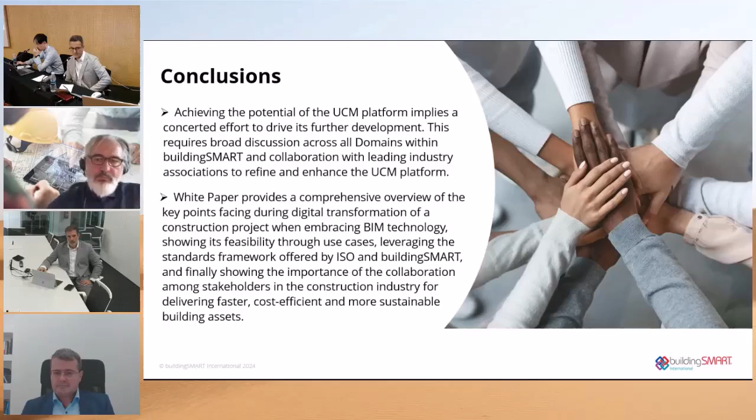So that's all. Maybe there is just a last comment. Ken wanted to say something on the future, and this is our last slide, and we hope that this will inspire all of us to work together on the next challenges. Yeah, so it's the final page, and what's next? It means that we will continue working in this domain. The next summit will be held in Singapore. So please join. So I hope that we can see you again.